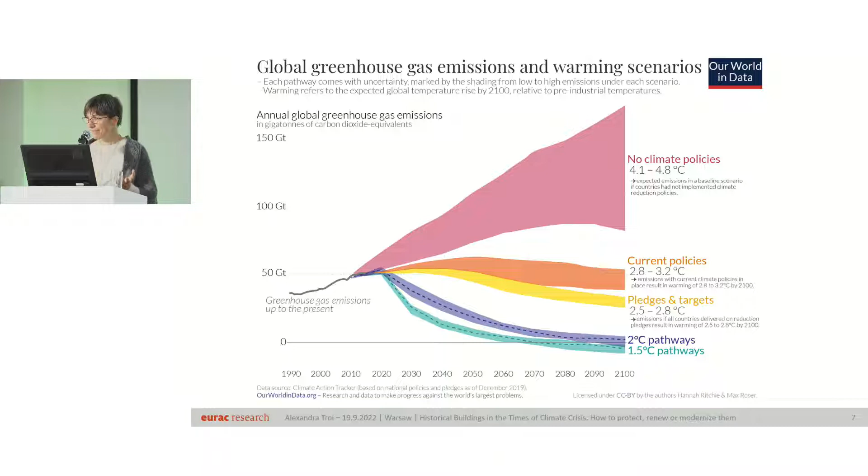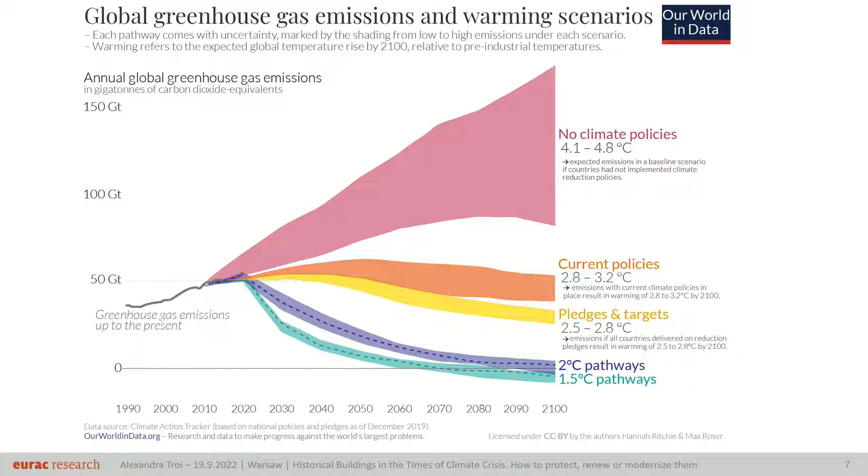What you saw with the images is all European cities. I think you perceived, like me, how beautiful they are and how big the variety is. And on the other hand, we see, if we look at our carbon budget, that if we want not to avoid temperature rise, but to keep it in a bearable limit, we really have to go down very, very sharply in the next years with our carbon emissions.

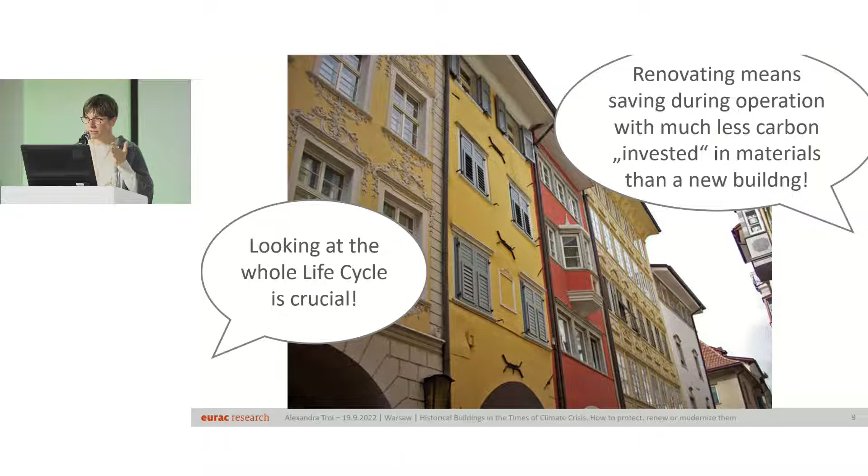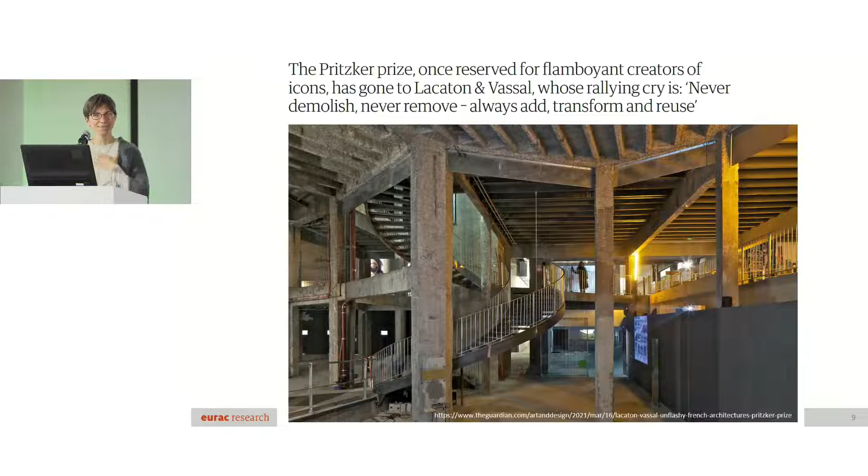And what does that mean for me? I think looking at the whole life cycle is crucial at this moment. And I believe that renovating means actually saving during operation, with much less carbon invested in materials than building a new one. So if we want to really come down fast with carbon emissions, we should renovate, not build new. And I was super happy last year when the Pritzker Prize, which was usually for very creative, upstage architects, went to Lacaton and Vassal with the motto: never demolish, never remove, always add, transform, reuse. I thought, okay, this is what I really believe.

I think it's also a lot of buildings, if we look at them in a bit of a wider definition. This is the inner city of Bologna. In Europe, we have 14% of the buildings from before 1919 and 26% from before 1945. If we take these two numbers and look at statistics across Europe, you see that in quite some countries, especially those with a big building stock, the share is high. Look at the UK, France, Spain, and also Poland, yeah? It's 1/4.

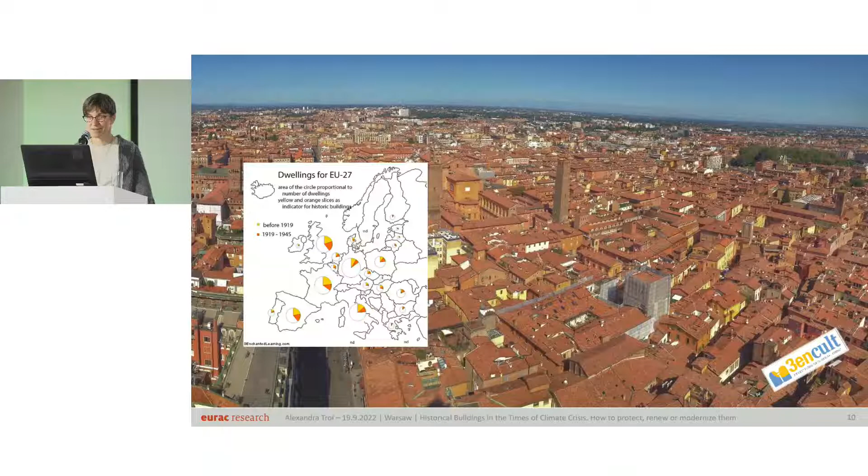And in this 1/4 of the dwellings in Europe, there are actually living people. There are living 120 million Europeans who would like to live there with a good comfort, without paying too much. And I think it is mainly also people who like living in these buildings. And this is, I think, the key where we should attach, which we should use.

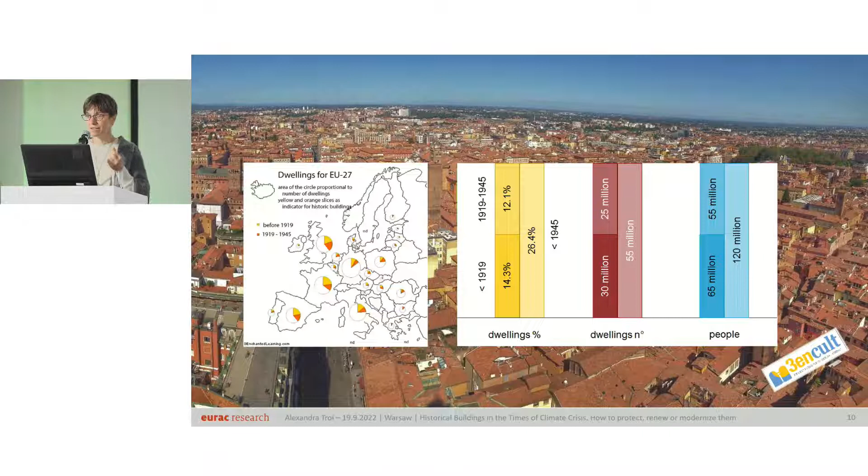I know there are a lot of cases where energy retrofit of historic buildings did go wrong. I sometimes can understand heritage authorities if they are skeptical, because I have been shown pictures of cases where I say, no, how could they do it? But I would like to promote, to show the good examples. I think this is more motivating, this is more triggering, this can help the building owners, the architects, but also the heritage authorities to do it and do it in the right direction.

What I would like to show you is, first of all, this HiBERatlas. HiBERatlas stands for Historic Building Energy Retrofit Atlas, and it collects good examples. It has grown quite a bit. It's nearly 70 cases we have documented here. And they are documented independent of the level of formal protection. So I think half of them are actually listed buildings. Half of them are buildings where the owners, the architects, perceived a value to be preserved.

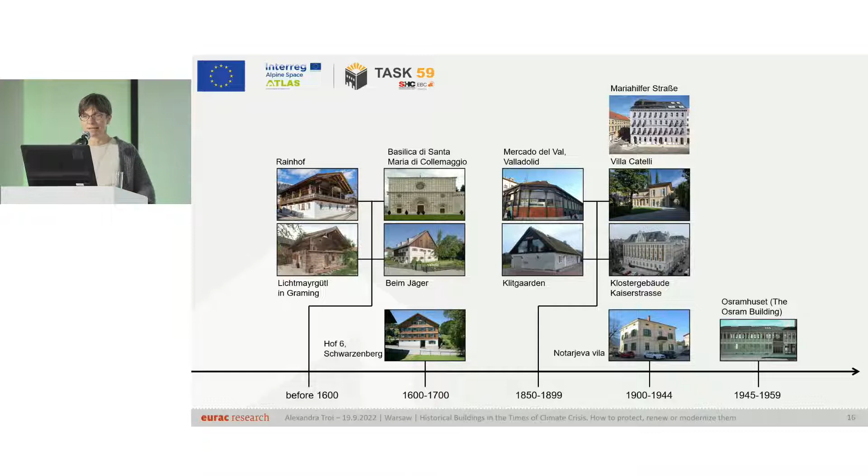And also the range of buildings in terms of age varies from old buildings, medieval buildings, 1920s, post-Second World War. So you see here just some examples of the variety of buildings which are in. What was the condition for a building to be documented here? First of all, real building. Implemented, done, finished. Not just an idea how we would like to have it. This is also important, but here we wanted to show implemented.

Renovation of the whole building, or at least the ambition at the beginning to do so. Not just PV added, not just heating system changed, not just one aspect, but building as a whole. Then we wanted them to be ambitious from energy point of view. We did not put a limit. I think this depends too much on the single building, but we wanted the approach to be ambitious. And we wanted also that the heritage compatibility did really guide the process, that this was an important factor in the decisions.

And then we wanted a minimum of documentation. We first started with, okay, let's look for buildings which are monitored, but that would have limited quite too much. So a minimum of documentation of the technical solutions and, if possible, bills on how it works now.

Why did we document it? I think I said that already. We wanted to show good examples in order to trigger, to make people see what is possible. Therefore, also this focus on images, on photos, on experiences, for people to look at it and get inspired. It is a website which has been done in a way that it is also quite nicely usable on tablets and mobile phones, so you would have this browsing experience. And I would go with you a little bit through it just to show you how it was done.

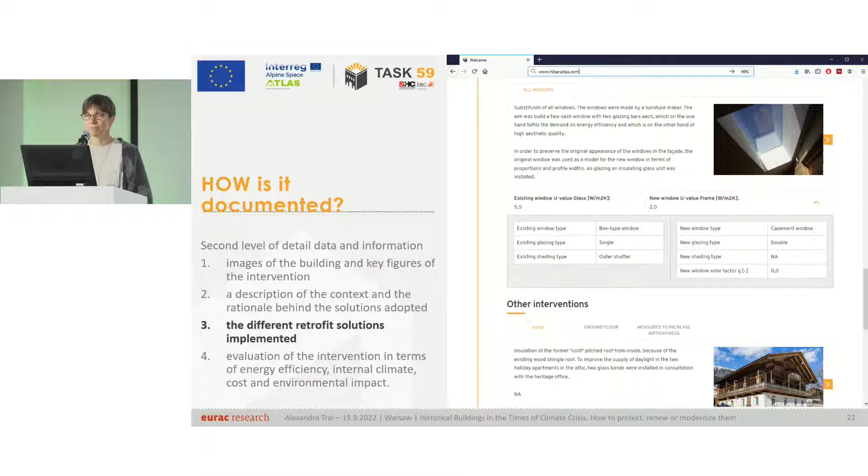And then, of course, it is not only about walls, it is also windows which are documented, it is interventions on the roof, ground floor, measures to increase the airtightness, it is on the building system, on integration of renewables. And the whole thing finally closes with some key figures, key numbers, energy use, energy performance, is there monitoring, how was the result on indoor air quality, and so on.

There's also one chapter on life cycle assessment, which unfortunately up to now is seldom filled. So there is, what we saw, not that much experience. A lot of interest. I think it will grow a lot in the next years, but not yet so many numbers to show.

How can you use it? When we programmed the site, the programmers asked, why do you want search functions? Why do you want filters? Why do you want maps? We had 5 cases, yeah? So the 5 cases were easy just to decide by looking at this first site. But now I think we have a number where actually all these functions are fine.

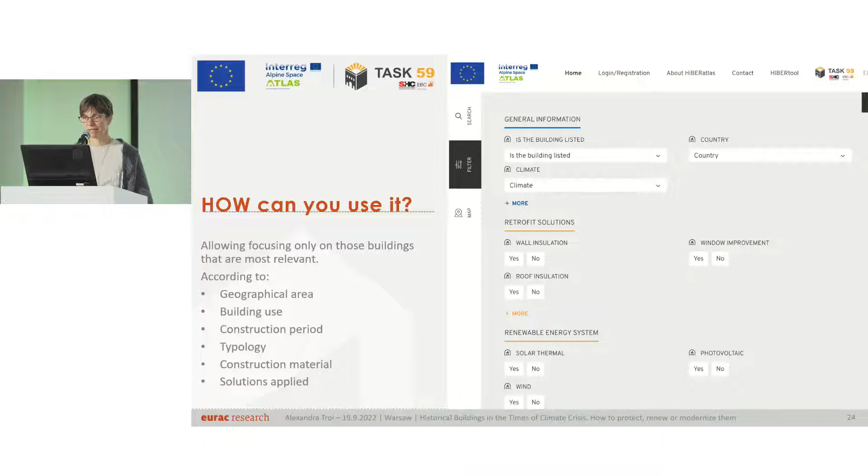There is this search function where you can search with a keyword. There is the filter where you can actually filter according to a number of specific fields, be it on whether it is listed or not, the country, the climate, focus on solutions, what has been done, and so on. And then finally, the map, where you can browse.

What you see here is that those who filled in the cases up to now came on the one side from Task 59, which was an international project, and from the Atlas project, which was an Alpine Space project. Therefore, this concentration in the Alps. But actually, the whole thing was done in order to live on also after these 2 projects have closed, which means that everybody should now be able to contribute to that atlas.

It has been done in a way that with a bit of guidance, any architect can feed in. And therefore the question to you, if you know a good example, get in touch with us.

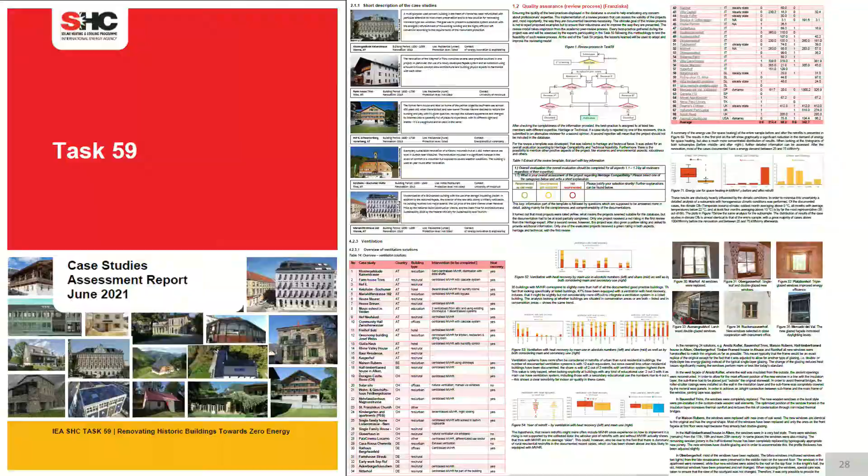There are also different reports from Task 59, from the International Energy Agency's Solar Heating and Cooling Programme. One is specifically on these case study collections, where you can find things like the short description of the cases. You see here that there is a kind of brief review process for cases to be published. The review does not have the aim to block cases, but to help document well. So there is one reviewer with technical background and one with heritage background, proofreading, giving feedback to the author of a case study before it is published.

What you see also is some statistics on the single interventions, on what was reached. I just point out one here. You see, this is the energy demand before the intervention. This is the energy demand after the intervention. So I think in the cases we show here, it was actually effective.

In the task, we had also a second part where we looked specifically at solutions, and we were thinking quite a while on how to make them available. And finally, we decided that we would like not just to publish them as a book you read from A to Z, but also guide the user to find the right ones. I think this is very similar to your decision trees, yeah? You have done a very similar thing, and maybe we can combine the two at a later moment.

Let's discuss that. So you see here, for example, walls. Then you go through a number of questions, and you get a PDF with a short summary. And if there is a case study in the HiBERatlas which features just that solution, there is also a link back to the HiBERatlas. Let's look at some of the cases. So at the moment, this has been implemented for windows, walls, ventilation, and solar.

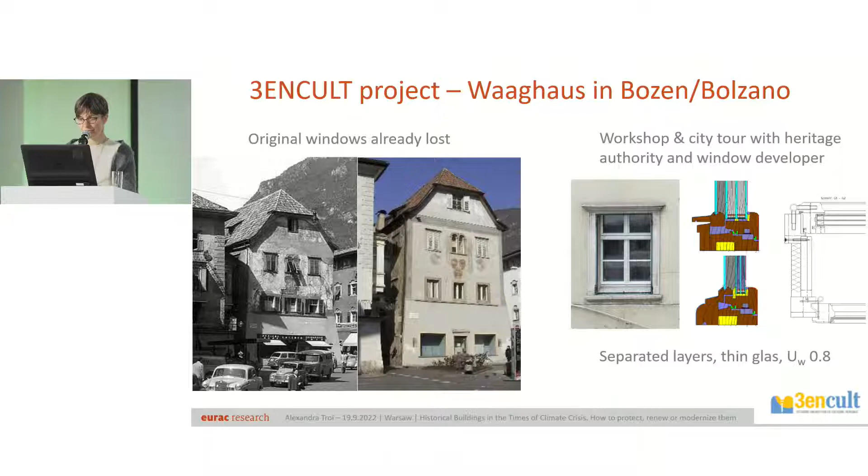So actually, we were looking also at window retrofits, and we tried to understand the different levels of intervention which you can have, from very minimum intervention to exchanging a window. And you see here a bit of a variety of cases which we looked at, which we also documented.

And what we saw in the last year, I'm not sure whether you have heard about the super bonus in Italy. You can get 110% funding for an energy retrofit, but you have to show that you have an ambitious intervention, which for a heritage building might be difficult. For windows, it would mean in our climate zone reaching a U value of 1.0. And with the retrofit of the box-type windows, we quite easily reach 1.2, 1.1, but this last step to 1.0 was really difficult.

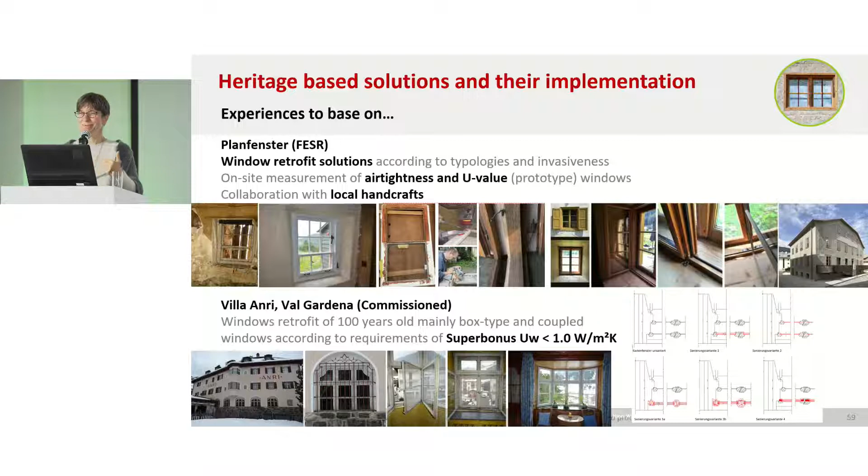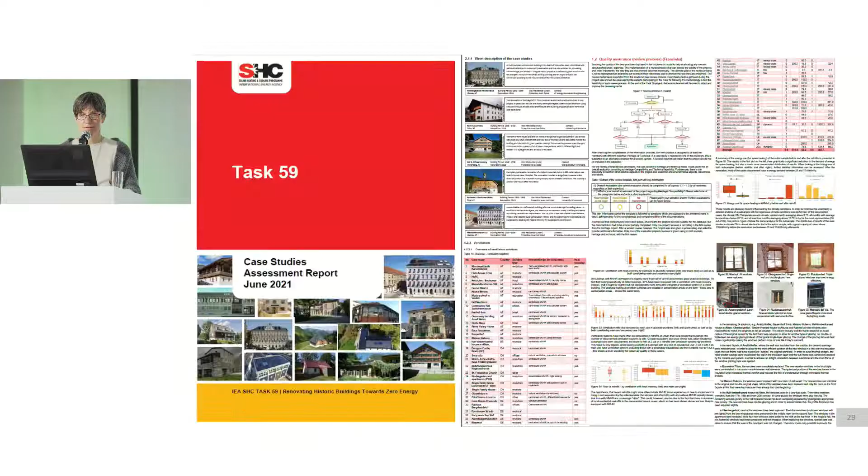I think I go a bit faster through here. These were things we were doing together with local craftsmen on the one hand, and with... no, one was missing. Okay, I wanted to show you my own building, but maybe it comes afterwards. We go on, in that case, with the walls.

Also for walls, before we look... for the windows, I wanted actually to go briefly to the tool itself. So just to show you, if I click here, the question would be, which kind of window do you want to refurbish or recreate? Let's say we have a box-type window. And we make it a bit smaller. Keyboards are all different. Okay, we have a box-type window. We should keep the appearance outside, but we could change the appearance from inside.

Then the next question would be whether... No, I think now I skipped one. So I already said that impact on appearance from inside is fine. Now I could say, okay, I could replace the inner glass. I could add a layer of glass. I could replace the sashes or window layer, or I could add a solar shading inside. Let's look at replacing the inner sash or window layer.

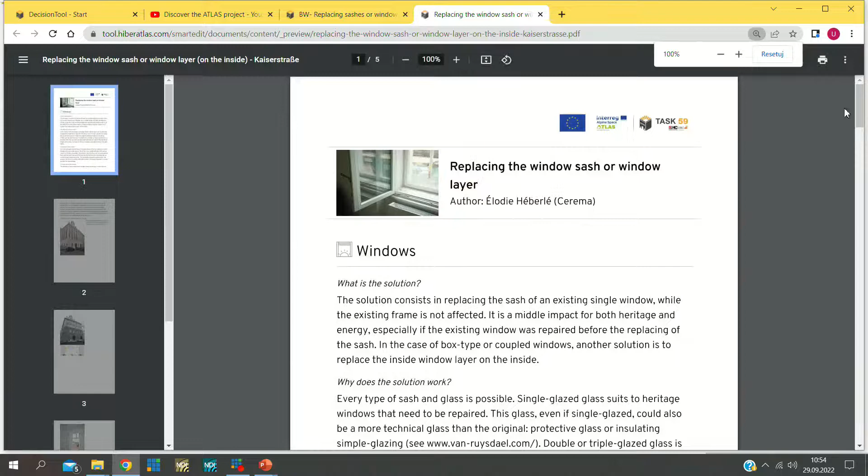If I go here, I would, for example, get this example with a description in PDF, which describes the solution, why it works, the description of the context, an example. And on the other hand, it links you back to a case study where this has actually been implemented, which in that case would be a building in Vienna. And you could then go to the retrofit solution, and see the description of what was done on the window, with different images and drawings explaining how and what was done.

Okay, let's go back to the presentation and start with the walls. If I talk about walls, I'm not sure how many architects are in the audience. Quite some. Okay, then it should be fine. Very often, and we can look at the different examples afterwards in the HiBERtool, insulating walls in heritage buildings will mean interior insulation. And what does interior insulation mean? I would always like to communicate it is a good solution.

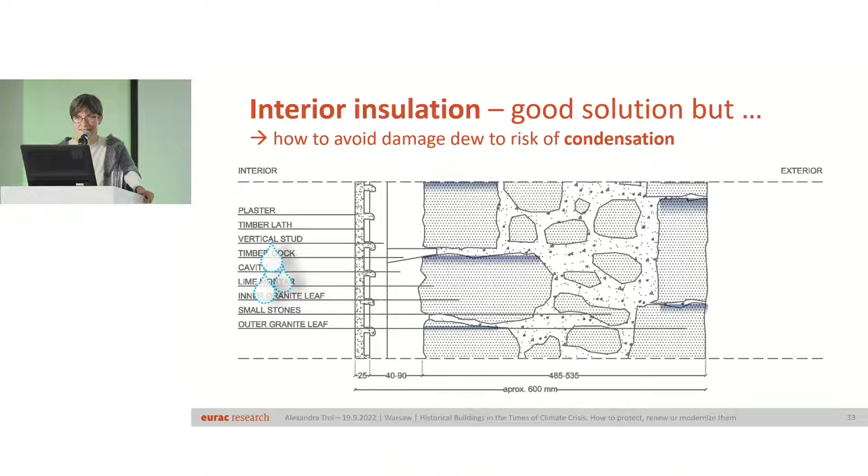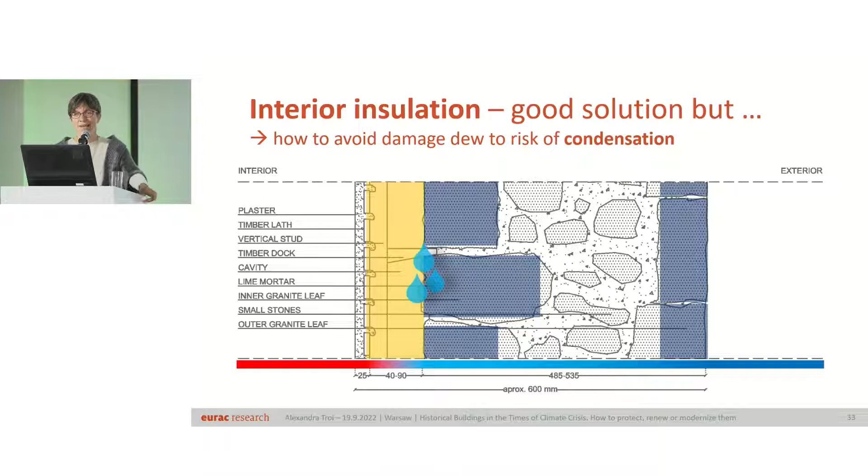There's a small but. The but is because as soon as you insulate from inside, your original wall will be cold. And what happens now if vapor passes through your insulation? It will condense at that point. Now you have mainly two options to deal with that. On the one hand, you could have a material which is capillary active. What does that mean?

It lets vapor pass. It has, however, also the capacity to store. So you have a sorption curve, which says at which relative humidity how much vapor can be stored, can be taken up by the material. And it can transport liquid water. So it kind of can suck the water, once it is condensed, back, and it can dry out again towards

the inside. Vapor in winter would never move from that point to the inside. Vapor in our climate goes always from inside to outside. But the water can be transported back to the room. This is the mechanism of such a capillary active material.

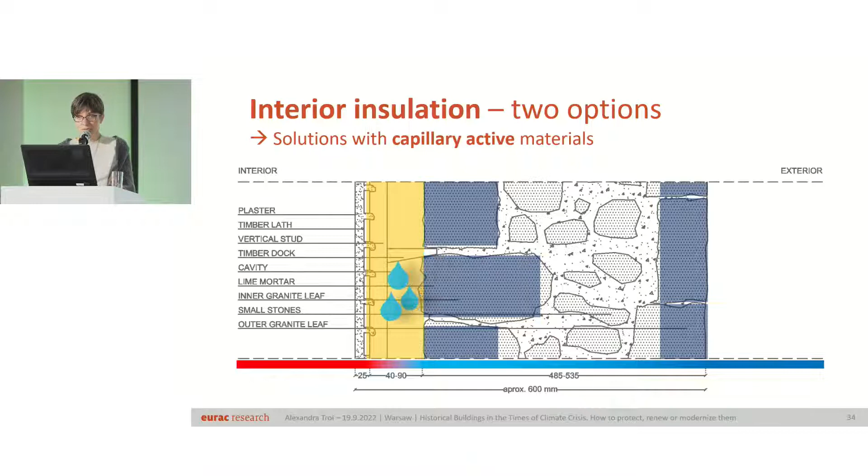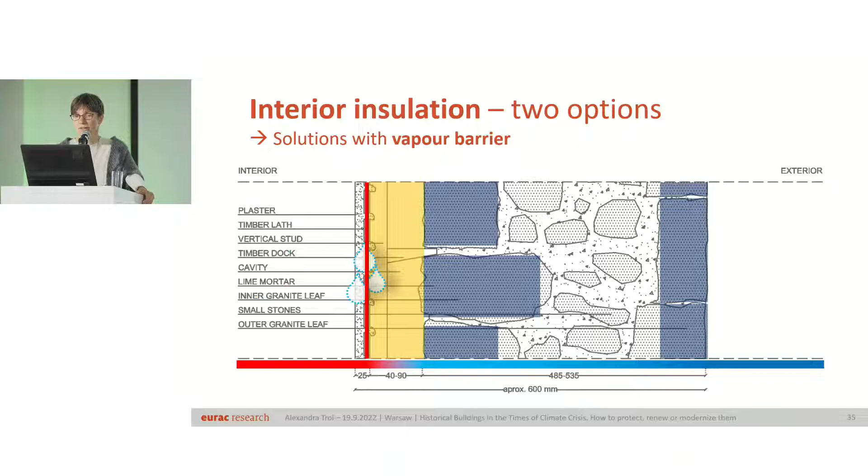The other solution, and here it moves. The other solution could be that you actually avoid that the vapor goes into the construction. You can have this with a vapor barrier, which you add, which might be a single foil, or you have the whole material vapor tight. This is the other option. In that case, of course, you avoid or at least limit very much the vapor which goes to the cold part, and you avoid the problem this way.

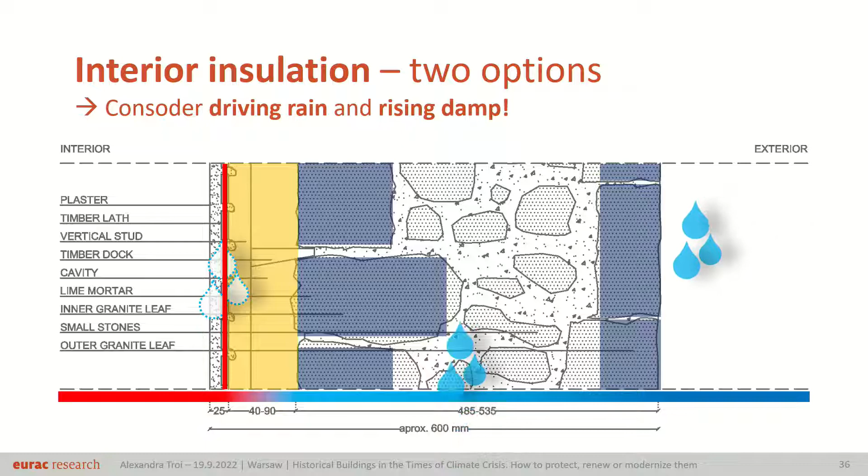There is one second drawback I would like to mention. This is: humidity in the wall does not only come from the room. It could also come from driving rain on the wall, and it could come from below in the wall. If you have a vapor-tight solution or a vapor barrier solution, it means that all this water has to dry out toward outside, because towards the inside it cannot go. While if you have a capillary active insulation system, it's easier to deal with this situation.

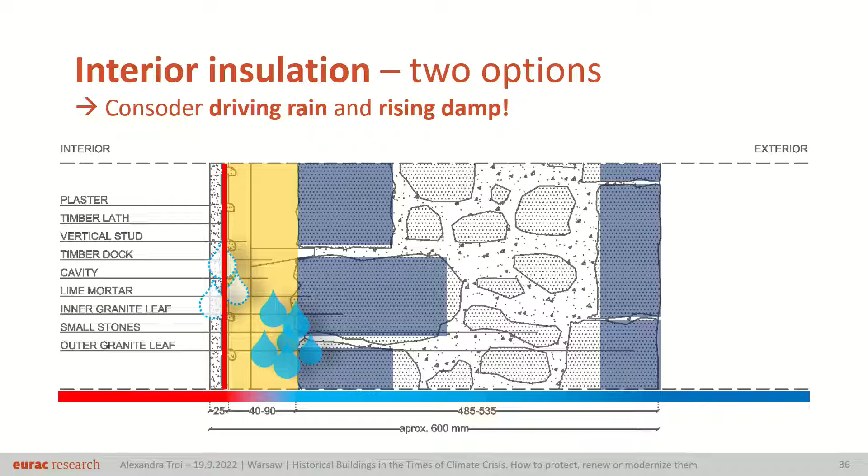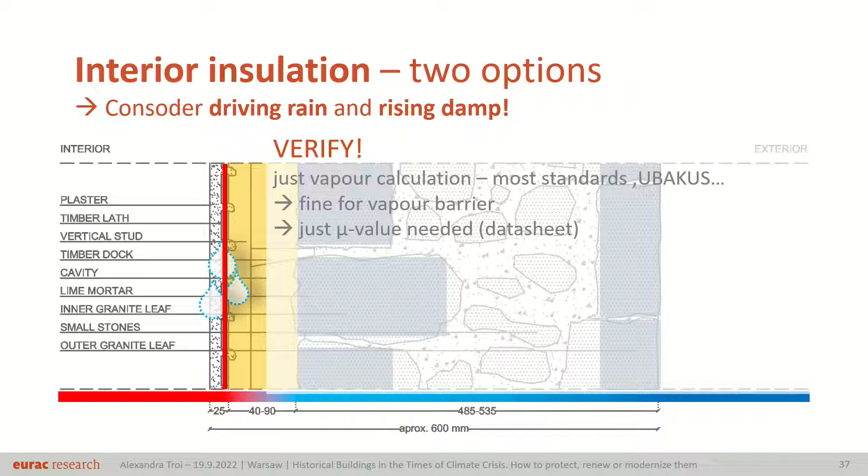So that means if you have a vapor barrier solution, you should be sure that you have a driving rain-tight surface outside. This means you would usually verify whether the solution you thought about does work. Most of the standards and easier tools for architects to calculate U values and so on do also do a first verification from that point of view. But these usually just look at how vapor moves. This is fine for the solution with a vapor barrier, because the main concept is done. And the second advantage is you just need to know the mu value. And this is something you can find on the datasheet of the materials.

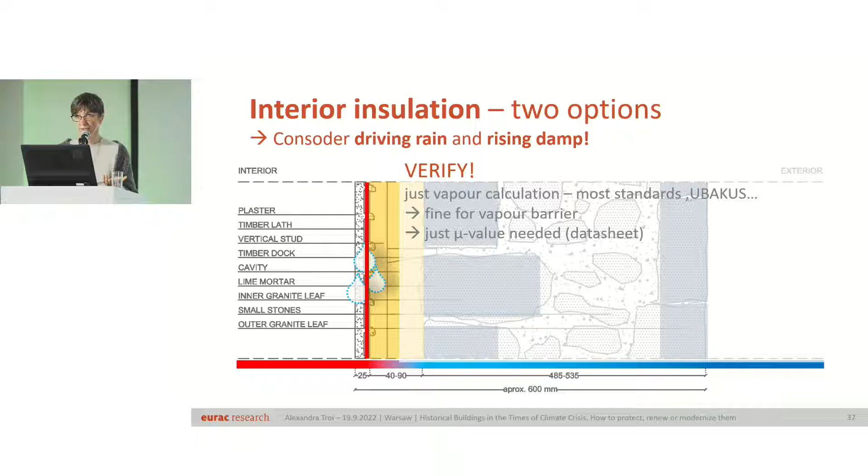But with these calculations, you would not see the capillary effect. You could, of course, choose in the database a capillary active material, but the program will not consider that the material can transport liquid water. It will not consider that it can store. So it would look as if it was worse than it is.

If you really want to simulate, to verify for a capillary active material, you have to do a dynamic hygrothermal simulation. And in that case, you need more information on the material, unfortunately. You need to know about sorption, you need to know about the liquid transport, and all these are not anymore single numbers you find in a data sheet, but these are curves.

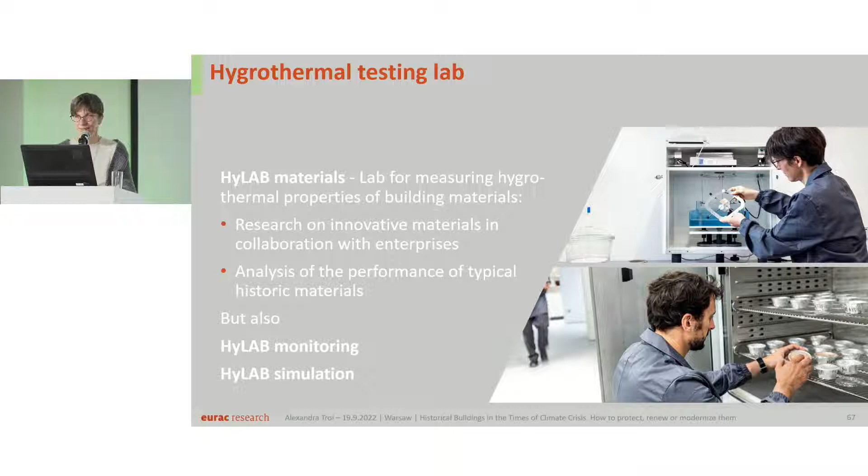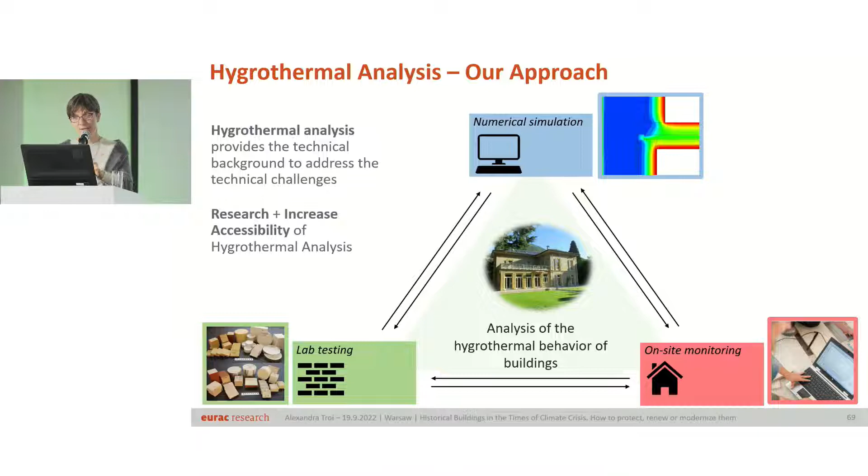Very, very briefly, an outlook to science. It's not only us, I think there are also other labs throughout Europe who do that, but we have a lab where we actually can do these measurements. We can characterize the materials, and we combine this with numerical simulation and on-site monitoring. This is how the lab looks like. You see the different materials. You see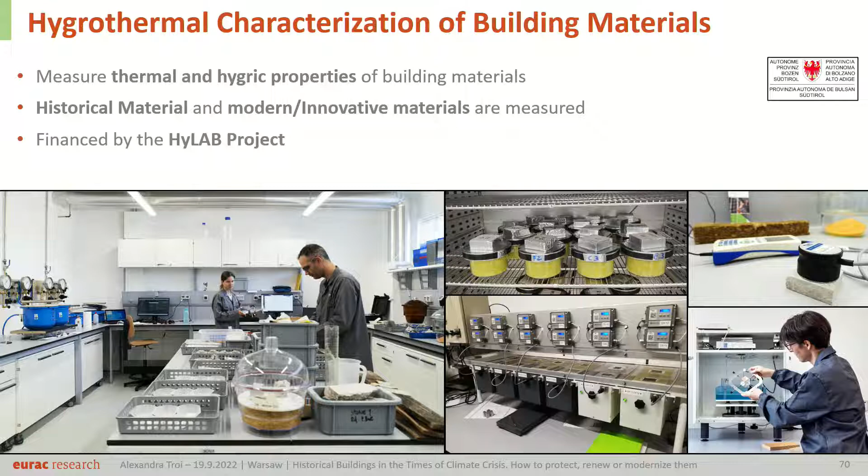this is where you measure the mu value. This is where we measure the lambda value. This is where we measure the water uptake. This is where we measure the drying coefficient of the materials. And these things are where we measure the sorption curves. So it's a lot of work to be done. I think, however, it's worthwhile to do.

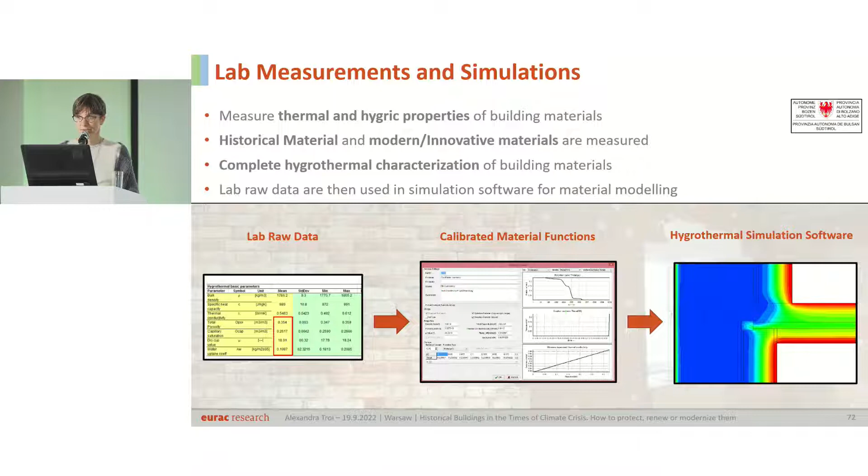You get these raw data. You have then the curves. And you can actually predict what happens within a construction, within a component. And this allows you then to see, on the one hand side, which temperature profile you might have within the wall, and also which humidity profile you might have. And what you see here is,

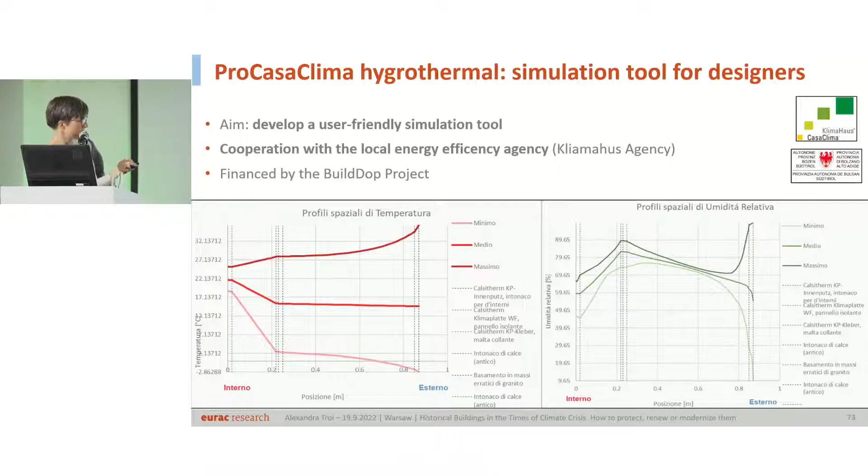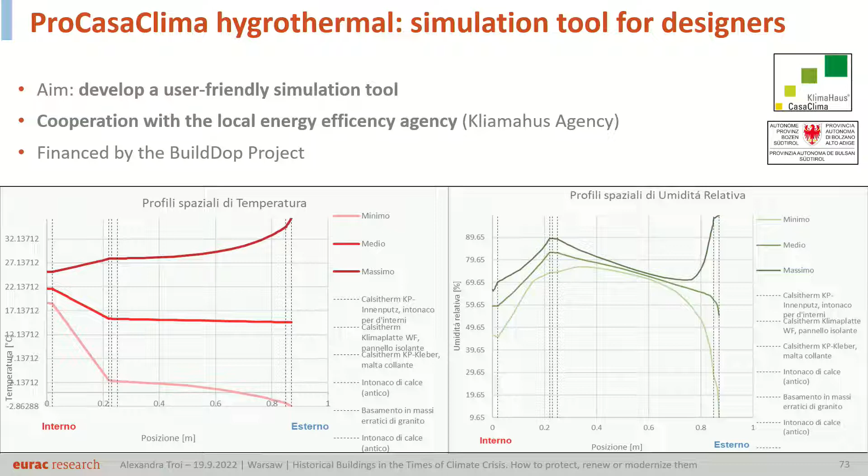this is interior insulation, this is the wall. Here it is cold in winter, and therefore here the humidity is high. And here outside, this is the rain. So the rain will lead to wet areas here. This is mainly coming from inside, maybe a bit influenced by how wet the wall gets via the rain.

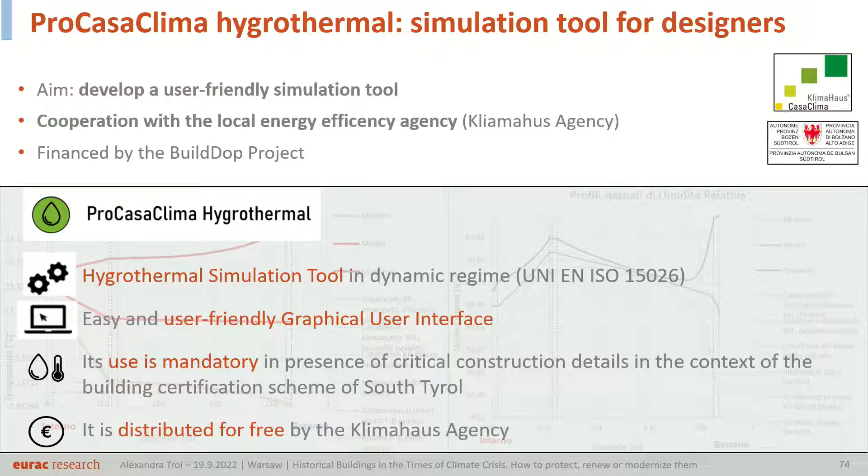Actually, our local certifier added to their energy calculation at least a 1D tool in order to do these hygrothermal simulations, because they say we will have a lot of interior insulation in future, not only in historic buildings, but in a lot of multifamily buildings and so on. We want our designers to be aware and to do the respective calculations.

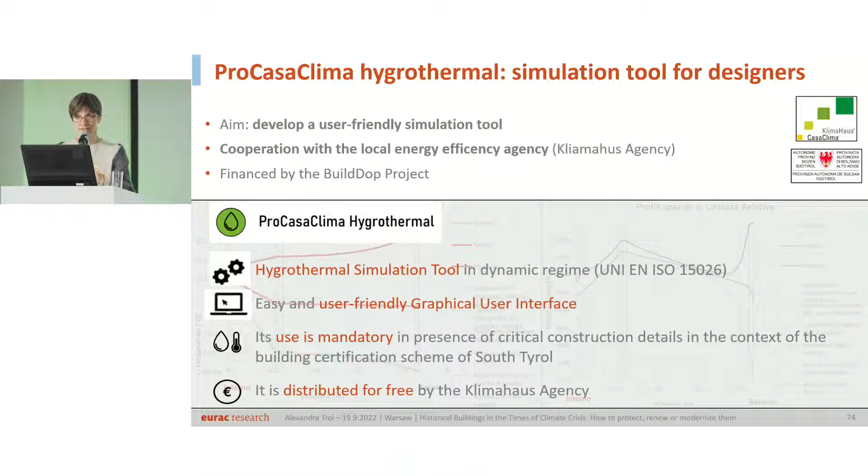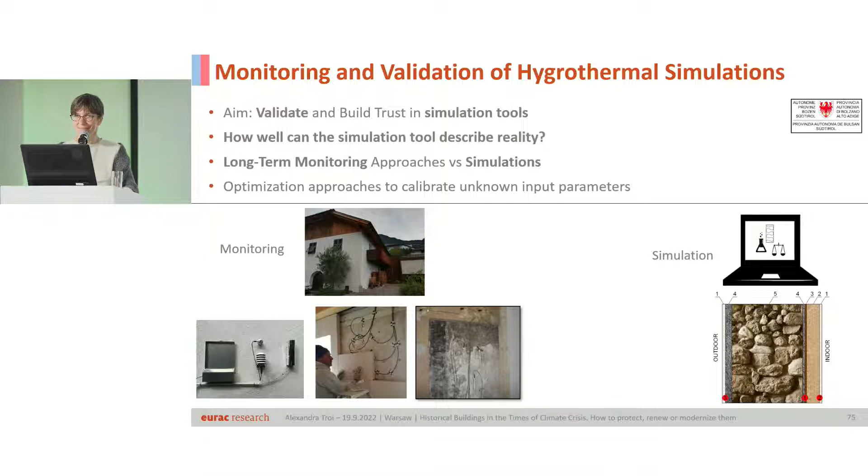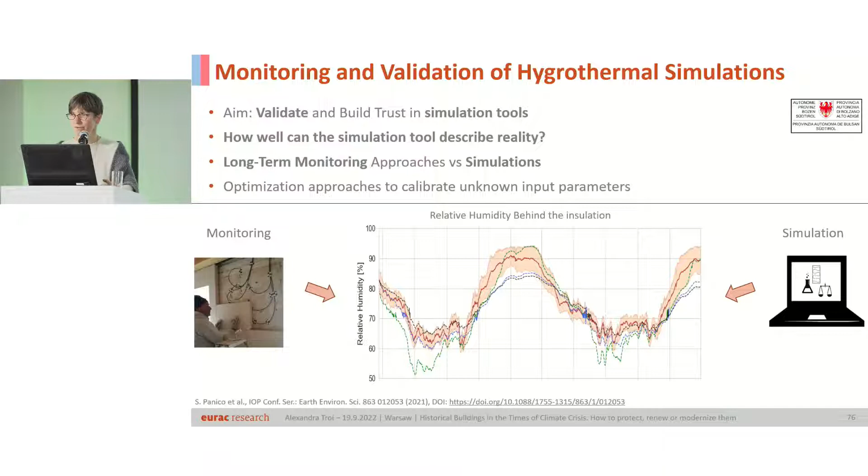And this is then a case of a monitoring where we actually wanted to see, okay, we calculate, and of course we engineers always believe that what we calculate is fine, but then we also want to show that what we calculate is fine. And what we see here is that actually we can reproduce what we measure with simulations quite well. So if you do the simulation the right way, of course you have to think what you do, but then you actually can get a good agreement with reality.

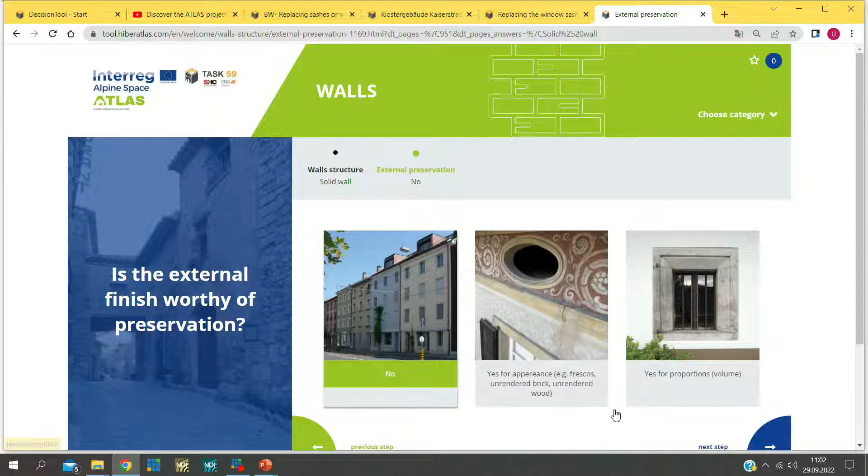I would have forgotten. I wanted to, of course, show you also one of the examples in the tool. If we go in here, I think in your case it would be mainly solid walls. You don't have that much timber frame in Poland, right? So let's go in here for the solid walls. Let's maybe first look at what the Hiberatlas tool would propose if we say the external finish is not necessarily worthy of preservation. There can be several situations where you can have this.

No, let's go to the exterior insulation. As far as I remember, they had quite some different examples here. On the one hand side, this was a case in Vienna with an aerogel high-performance insulating plaster system, so easier to keep the proportions, but still have a good performance. Then a case where you also might be able to do something outside is if you have shingles, a facade where you can put something behind the layer. And insulating from outside avoids this cold wall problem. So if you have a chance, do that.

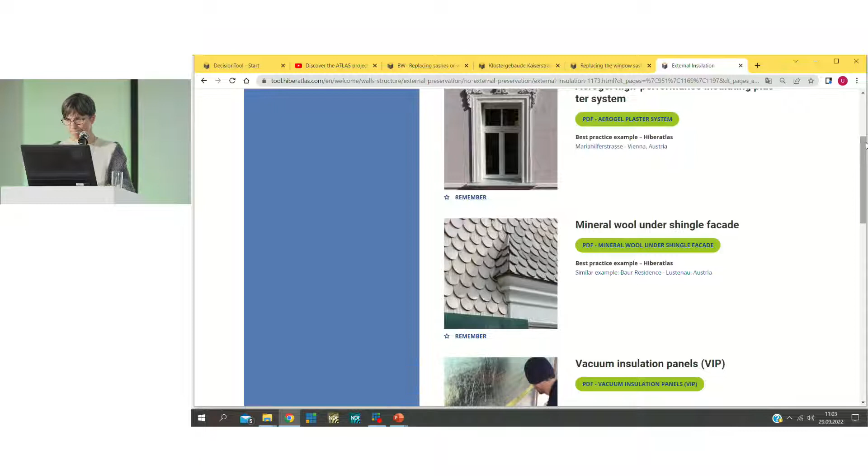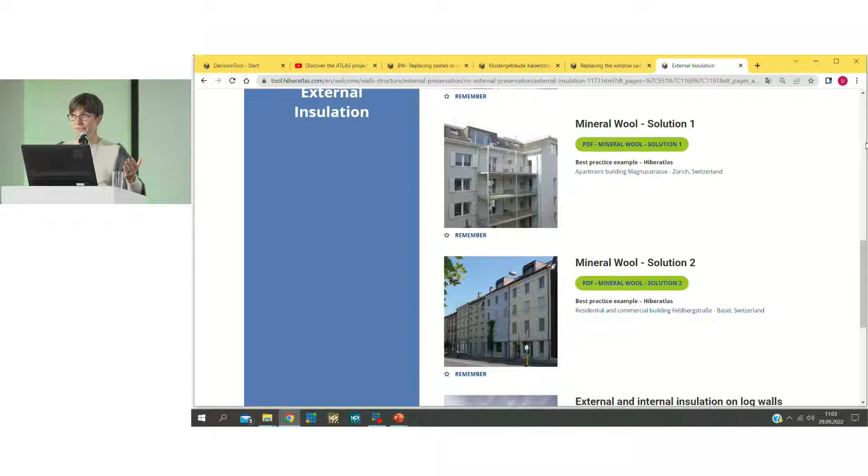Or there was an example with vacuum panels. This would be a typical situation. You might have a backside of your building. Maybe the front side is where you cannot insulate from outside, but the back side, yes. Use all these possibilities. That's what I wanted to show. And then, of course, you could go back and also look at the interior insulation solutions, if you say at the very beginning that your external finish is worthy of preservation.

For the ventilation, I actually would like to guide you through an example. Ventilation, I'm not sure how it is in Poland. My experience with the international project is there are countries where it is very common. There are countries where people think this is a luxury, not something for a common house.

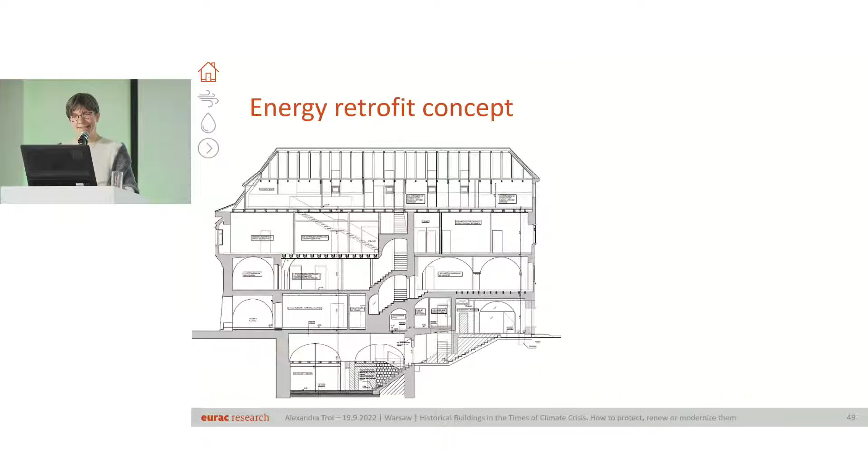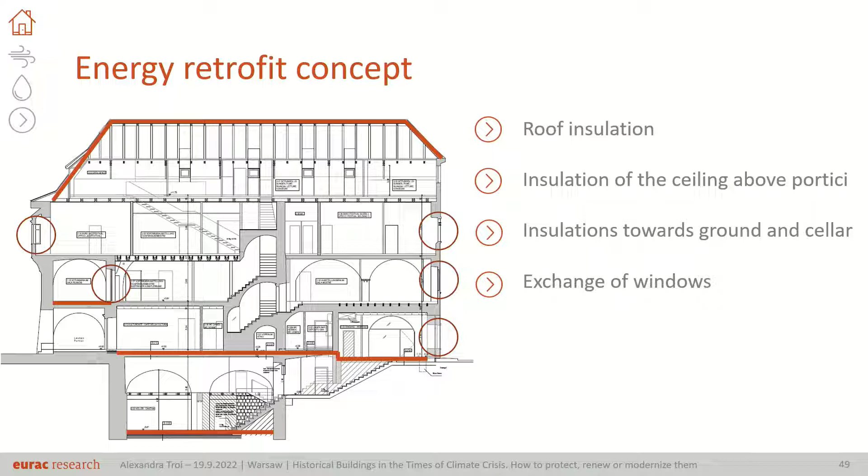And when we looked at, again, the Public Weigh House, which was the case study in 3ENCULT, we were in the situation that actually the architect had the feeling, I would like to avoid it. It worked until now. I have a lot of cases where it works also without. And we saw, okay, what you can do in that building. Roof insulation, that's fine. Then we could do insulation of the ceilings, above the portici, of the ground and the cellar. Windows, as you saw, were already exchanged, so new and better ones would have been a good idea.

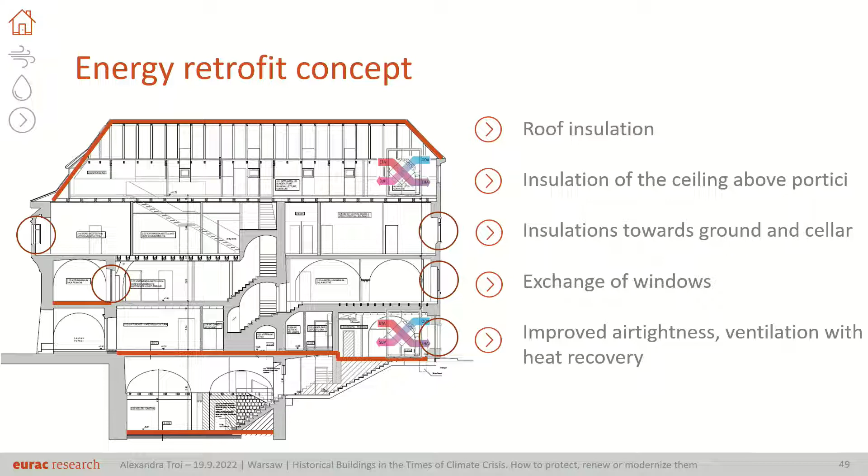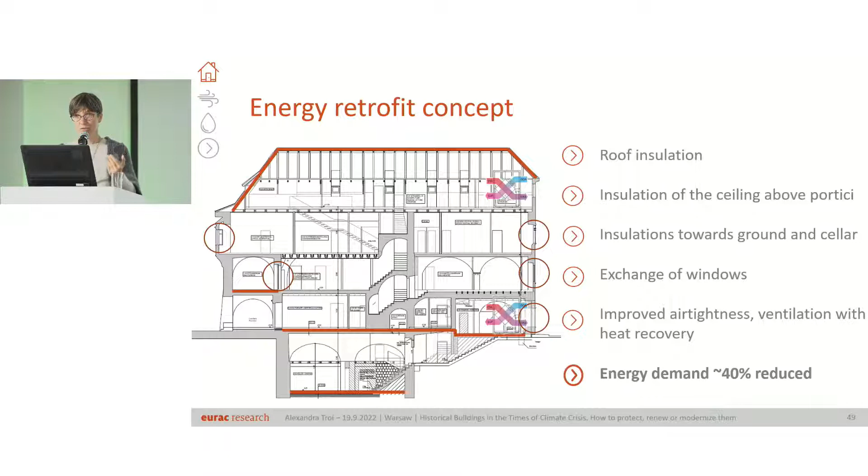And a ventilation system under the roof would have been an option, because new meeting rooms should have been integrated, and in the cafeteria at the ground floor. But he would have liked not to work on the other two floors. With these measures, we can reduce the energy demand by 40%. And we have not insulated the walls because the conservators told us we have original plaster inside and outside. It should not only be preserved, but also remain the perceivable surface. So we tried to go in that direction.

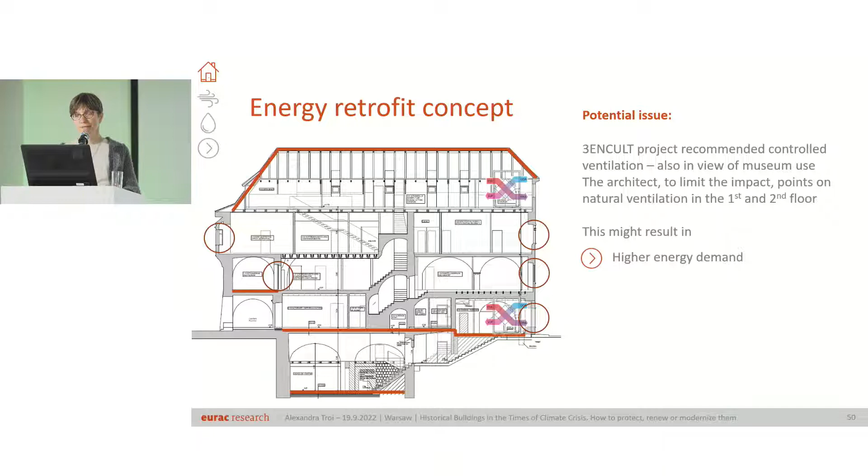If we now do not do a ventilation system, this is a higher energy demand. Of course, we don't have heat recovery, but we could decide that this is fine. What we actually feared is that we could have higher humidity levels because people might not ventilate enough. And if we have higher humidity levels inside, we have the wall which is not insulated. On the other hand, we have windows which are new, and new windows will always be airtight. So we feared that there could be a hygrothermal risk and wanted to have a look at it.

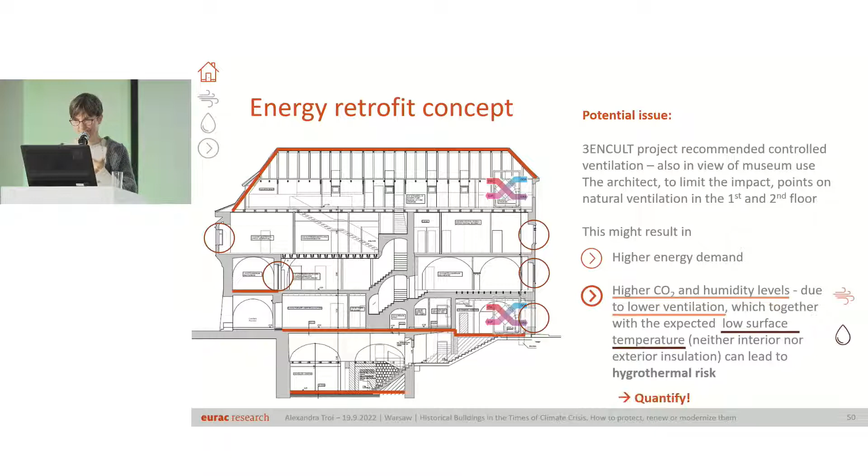We did the calculation with the CONTAM model, which kind of takes every room and understands how this room interacts with the exterior. You can also tell the system different ways how the ventilation is done. It can be a mechanical ventilation, but it can also be window ventilation, and it always takes the temperature differences inside and outside to understand actually which air exchange you have.

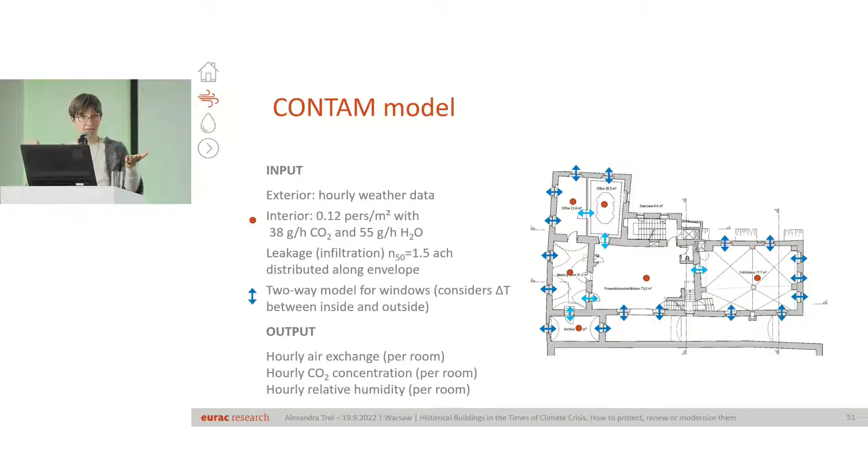Because if you open a window in winter with 0 degrees outside, 20 inside, you have much more air change than if you open it in summer, or spring, where you have 18 outside, 22 inside. All these things can be calculated, can be quantified. And what we saw here is we had 3 options.

We first thought, okay, option A, people open the windows during the lunch break, they tilt them. 45 minutes during lunch break, a bit open. B, they open them additionally in the morning and in the late afternoon before leaving. And 3, we have an active overflow ventilation system, so actually a kind of low impact ventilation system implemented.

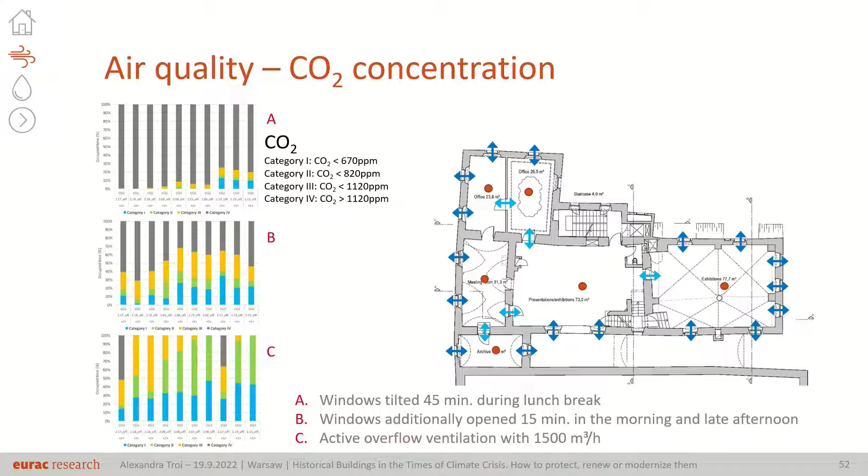What you see here on the left side is which CO2 level we get in single areas. Gray means bad comfort, and then it goes until blue, which would be category 1 quality. This was not the main issue there, but it is already a first hint on what it means for air exchange, and humidity is most probably related to it. We see that with the higher ventilation, especially in the late afternoons, we were already in a not so bad situation, but of course good it was only with an active overflow.

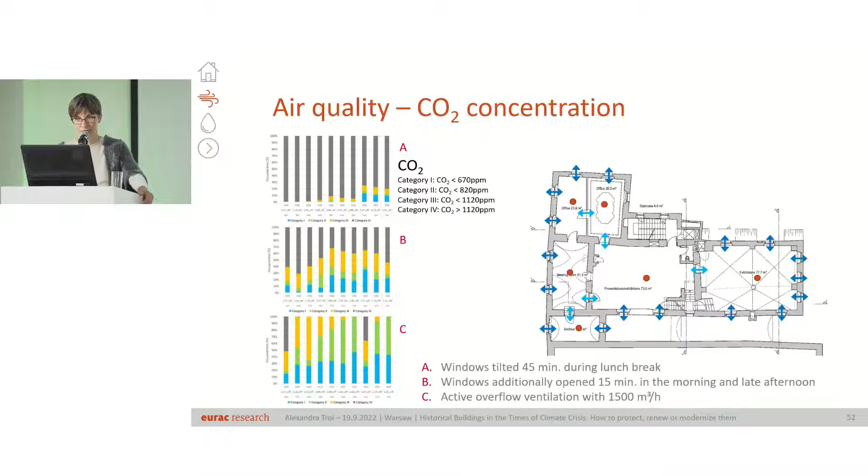What you see here is actually the humidity which we will have over the whole period, and standard-wise I would expect 50%, and I would calculate for 50%. We see here that with that ventilation system, we might have considerable times with higher relative humidities. So what we calculated would be fine might in practice not be fine. The green parts here you see, as soon as you ventilate enough, these periods get much, much lower, and with active overflow, we don't go beyond 50%.

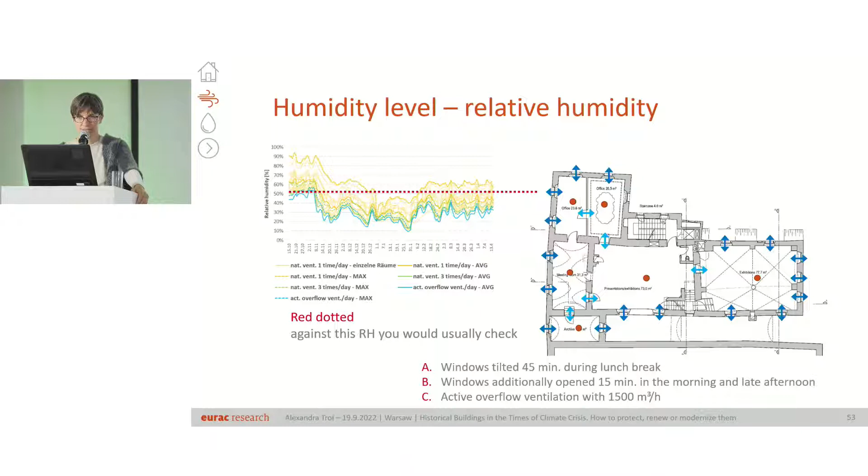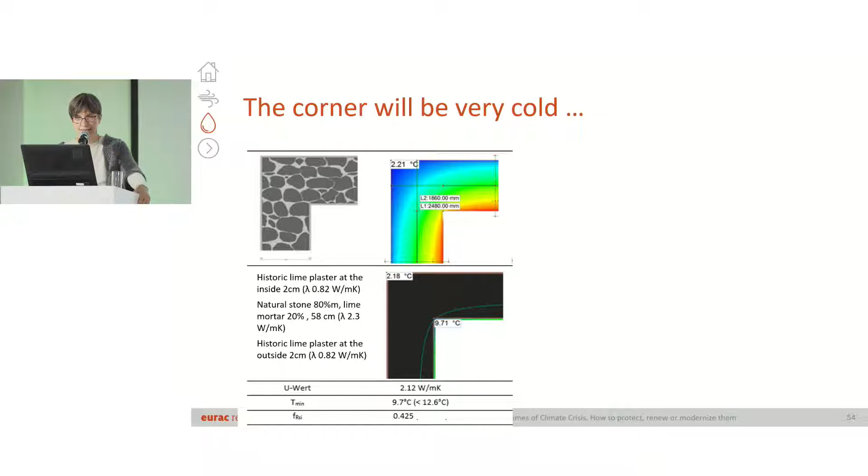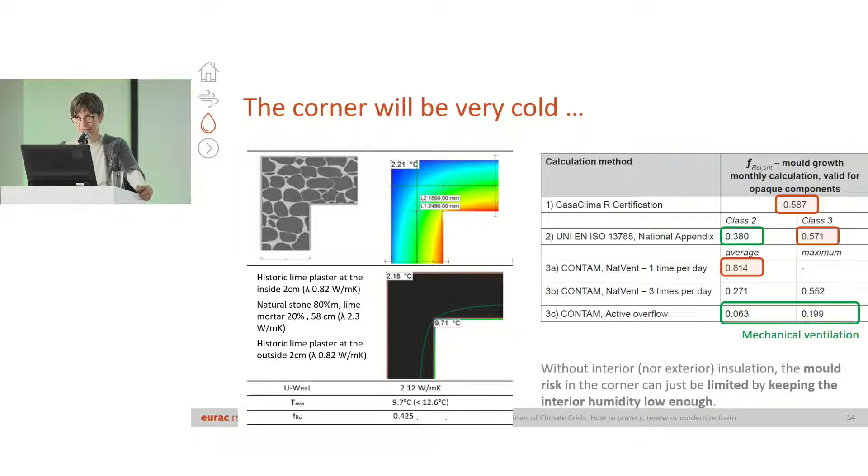And if we now look at some points where the temperature is particularly cold, which would be these angles in the wall, for example, where we would have 9.7 degrees. I don't go into detail in these numbers here, but we see that we would be on the safe side only if we guarantee a good ventilation. And the ventilation could be both B, so the window ventilation done in a proper way, or it can be a mechanical ventilation system.

For me, that showed a bit that maybe we can argue a little bit about energy demand, even if here, if we say, okay, carbon budget, it is as it is, maybe we cannot argue that much anymore. But we can definitely not argue about mold risk. We definitely want to avoid any mold risk in the buildings. And therefore, our strong recommendation was to guarantee ventilation in that case.

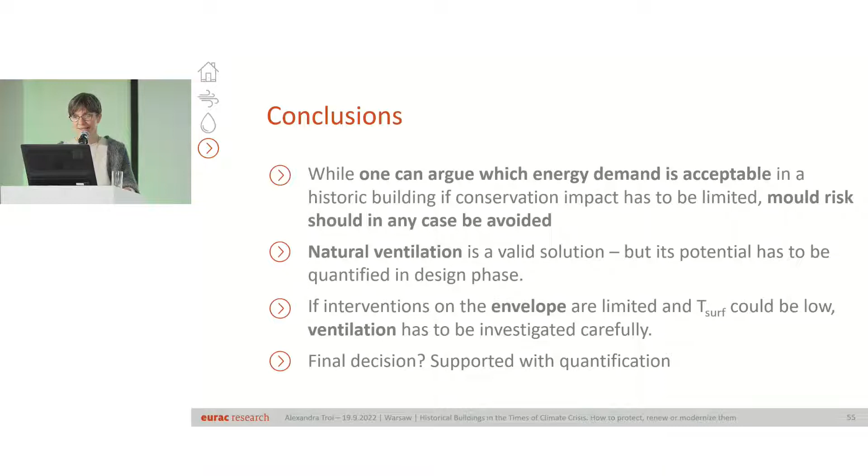In an office building, relying on people ventilating, I'm not sure whether it will work. If I think about myself leaving the office in the afternoon, would I take 15 minutes to ventilate? But maybe for other uses, this is still possible. We are actually discussing at Eurac these days whether we should go out with recommendations for this winter. I fear that people this winter will not ventilate enough. I fear we will have a lot of mold problems because people do not heat certain rooms. Those remain cold. The humidity will distribute anyway, and we will have mold issues in the cold rooms which are not ventilated. So ventilation, be it via a system or via a thought-out window ventilation, is really crucial.

One last point on ventilation: if you have a ventilation system with heat recovery, you can work with a slight under pressure. If you have a slight under pressure, you avoid humid air from the room going through any cracks into the wall. So also from that point of view, avoiding condensation, a ventilation system could help you.

And as regards the solar, I would also just go into the database a bit and look with you at different cases. The cases came at least partly from one more project, an Interreg Italy-Switzerland case, which was called BIPV, so Building Integrated Photovoltaics Meets History. And we were looking for examples. So let's, for example, start: can renewables be installed on the roof? Let's start with yes, and look at, for example, something which is integrated.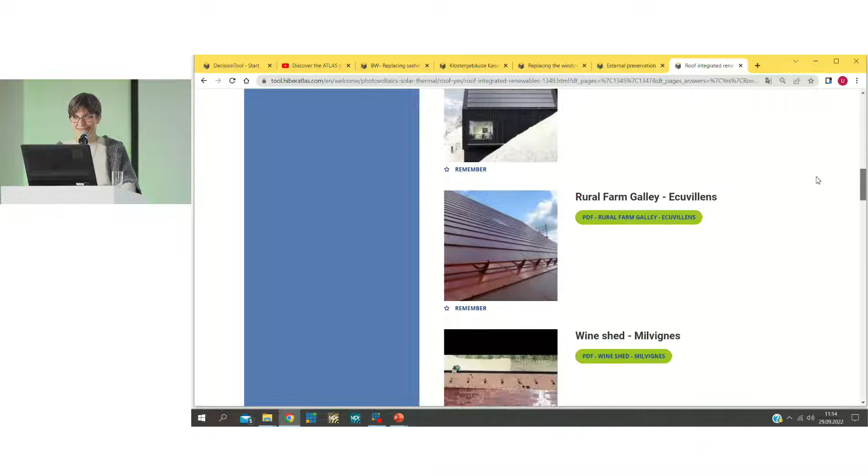What a pity. Okay, because in Edinburgh, they actually had the situation to use a space. So the roof has quite an M shape. So actually, you had two surfaces which you could in theory use. Then, of course, only one is probably in the right direction. But still, this was a case already 20 years ago where PV was installed.

While I think nowadays, we do have materials where actually we can also work on surfaces which are visible if it is done in a way which is aesthetically acceptable. And what I perceive also is that from heritage authority point of view, there is more openness.

They actually were involved also in the Ticino-Lombardia area, and it was also a question from the heritage authorities to understand how can it be done today. What could be possible? And they explained what would be their condition, how it has to be in order to be acceptable. While actually, when our own authorities in Bolzano knew about the project, there was a big, big fear. What are they doing? They are promoting, Hilfe!

On the other hand, for example, Germany, my colleague Franziska from ICOMOS, who's also president of ICOMOS ISCES, has been invited several times in podium discussions where actually the issue is discussed. So I see a new openness, and I saw, for example, when I was in the city of Einbeck, we were working with students on the building there. We were making several

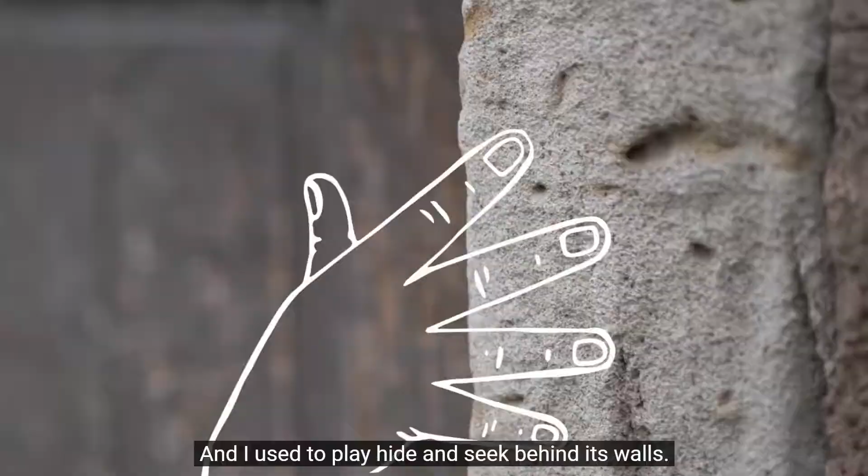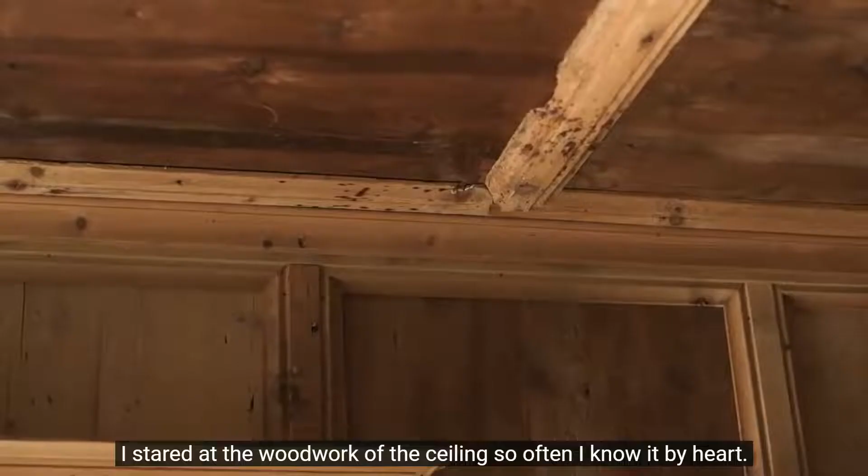This is my home. I remember when I was a child, and I used to play hide and seek behind its walls. I would choose a spot and stay hidden for hours, watching the clouds pass by, listening to the crackling sound of the logs burning. I stared at the woodwork of the ceiling so often I know it by heart. Time has not been kind to this building. Cracks, drafts, and moisture have made it more and more unpleasant to live in.

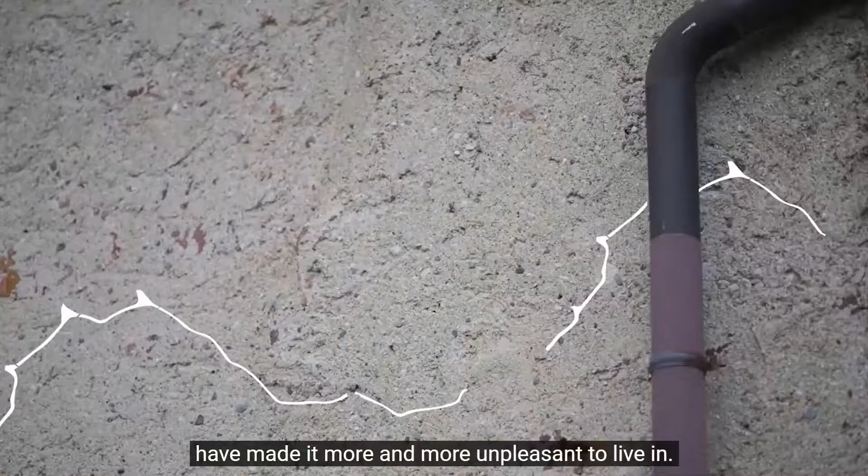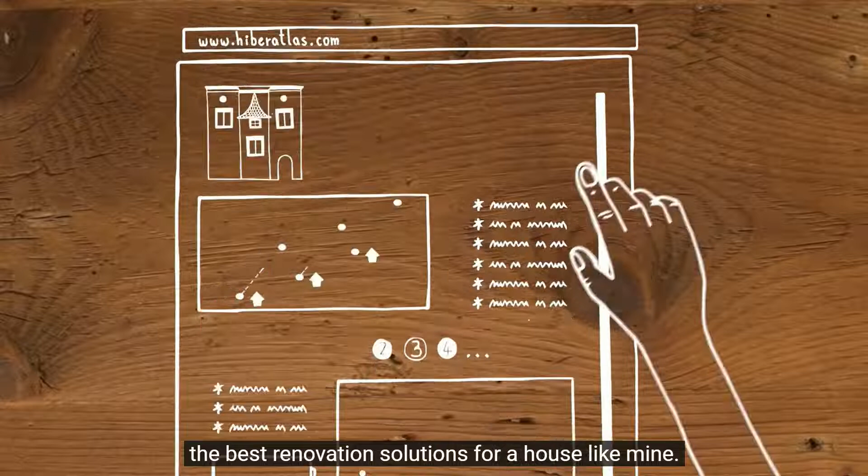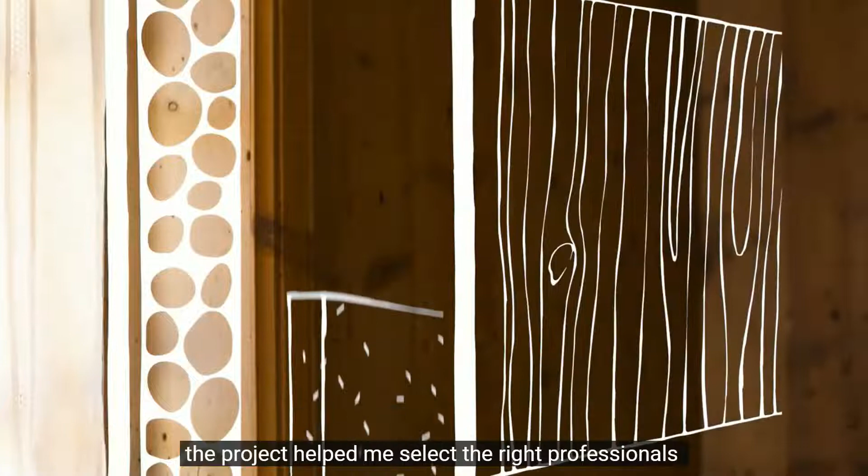But then I discovered the Atlas project. From dozens of examples, I was able to choose the best renovation solutions for a house like mine. I can tell you, it is not easy to refurbish a building whose history goes back centuries. Most importantly, the project helped me select the right professionals to carry out the renovation works. This allowed me to not only save my home, but also to make it more efficient and sustainable. Better for me, for the Alps, and for the planet.

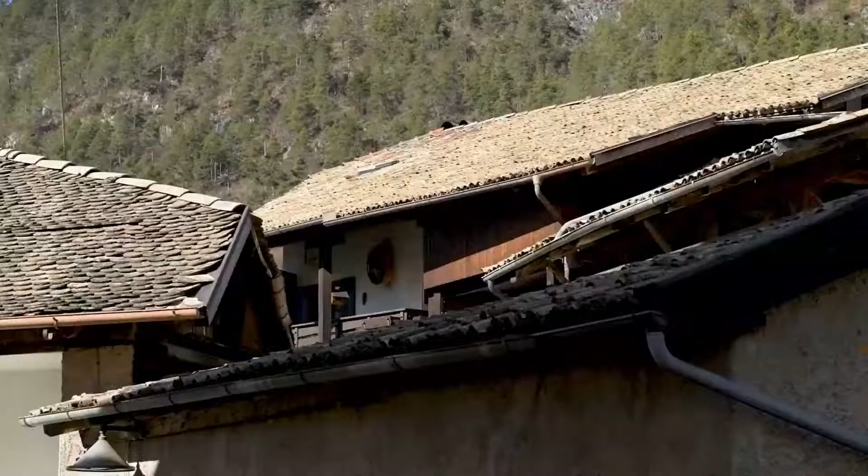Thanks to Atlas, I learned that preserving my home means so much more than I had first thought. It means protecting our cultural heritage, our common roots. This is my home. This is where my family has been living for generations, and where it will live for many more.

And as I said, I think we can exchange Atlas with the project you had here in Poland. And I think this is our chance, that people actually see and like the buildings they're living in. And if they are guided, we will manage to reconcile climate change mitigation with cultural heritage preservation.

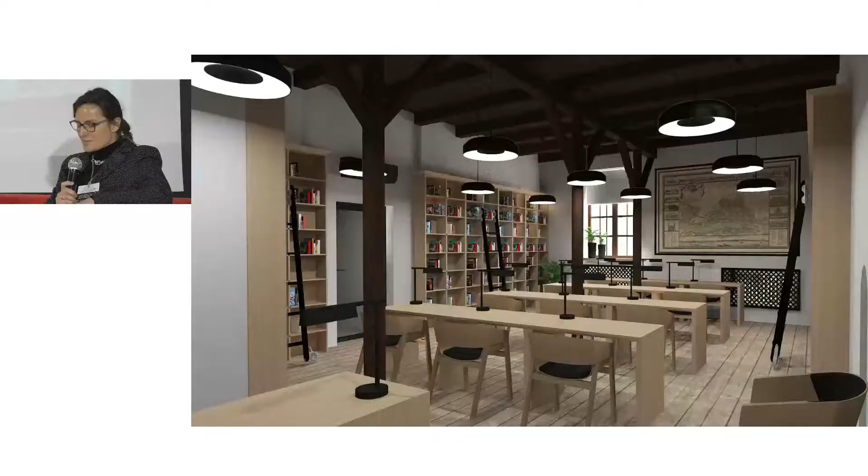When it comes to quality of life, I carry an internal mission within. Now, those are case studies from Mam Architecci, this particular studio. I am inclined to engage in grassroots work. Everybody knows that we need to insulate walls and replace windows and apply PV. Nonetheless, ventilation has remained something of a taboo.

People approach us telling us that there's mold, for example, and then when we talk about ventilation, everybody is kind of staring at us. Not here, obviously, because everybody present here is well aware of what it is all about. But when I talk to people who have nothing to do with the construction industry whatsoever, they don't know what I'm talking about. I really have to go on talking and talking to install ventilation valves and systems in windows.

And the people keep coming back with the same topic, telling me the window seller told me that I don't need that, I don't need the ventilation component. So people are really obstinate. During one of the workshops, one of the colleagues suggested that possibly people ought to have humidity meters installed in their homes, and once people are aware and can see for themselves what is going on, they are going to opt for ventilation systems.